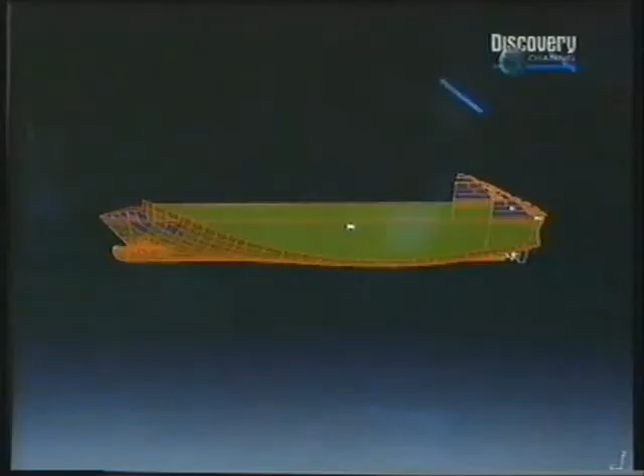This is what is dominating, and that's why you are defining a certain kind of block coefficient. The block coefficient is a relationship between the box you would get from the draft, length, and breadth of the ship. This is giving a box, and the shape of the underwater hull is only a percentage of this box. The displacement, the speed, and the length of the ship are very much married to each other, and this has been found historically during the development of shipbuilding. There is always a relationship to be kept, otherwise the power you have to bring into such a ship becomes much too high, and the economical factor goes down rapidly.

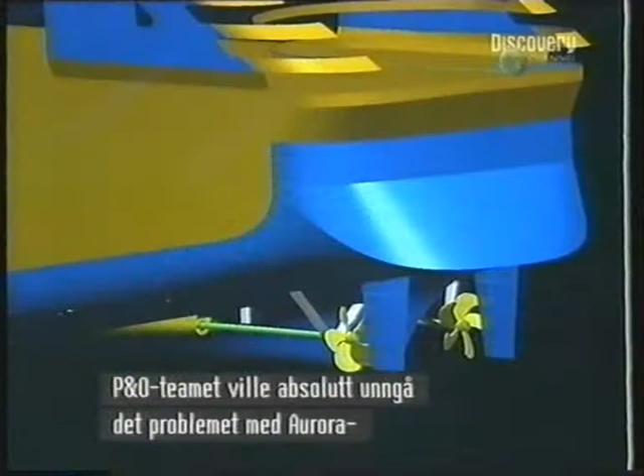Aurora's sister ship, Oriana, had suffered initial vibration problems at high speeds. The P&O team were determined to do everything possible on Aurora to avoid that problem and began to tackle it early on. We wanted to try and improve on the vibration characteristics that we had on the previous ship, the Oriana, which, whilst satisfactory, were only just satisfactory, and we were certainly looking for an improvement there.

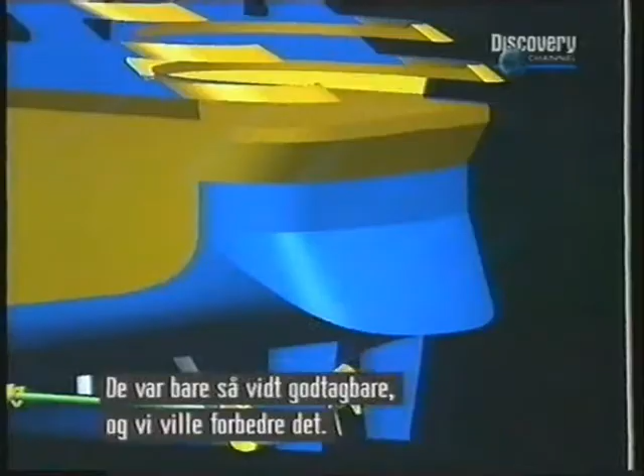At the aft end you will see the ship has a rather distinctive shape, what we call a ducktail on the end because it looks like a duck. The effect of this is to increase the waterline length and improve the flow of water into the propellers. The better the flow and stability of the flow into the propellers, the less likely they are to make noise due to cavitation.

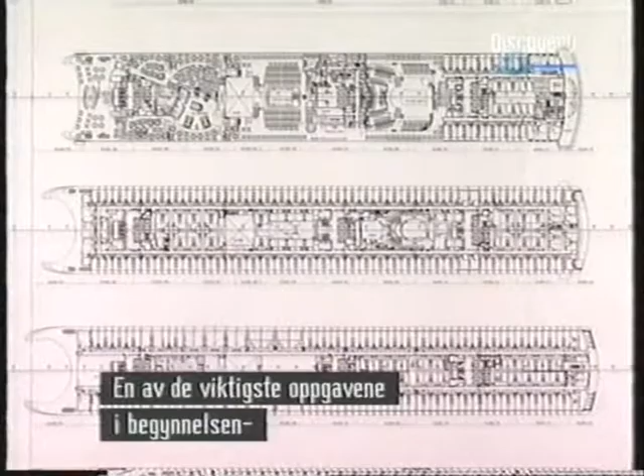One of the most important jobs to be done early on is the creation of what's known as a General Arrangement Plan, or GAP. Space is at a premium on a ship, and it's the GAP that divides up that space.

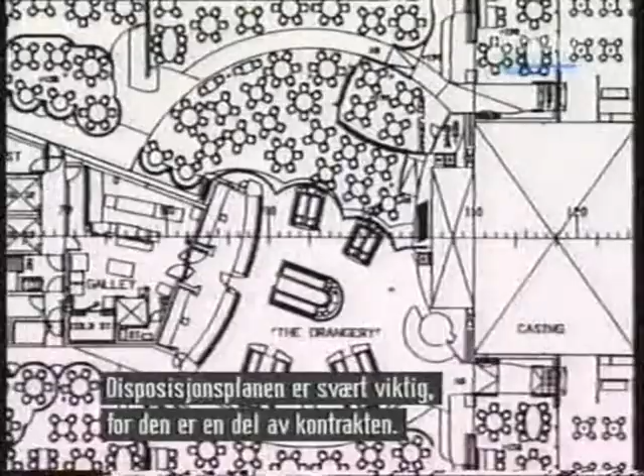The General Arrangement Plan is a very, very important plan because it is part of the contract. Everybody is getting his portion of the cake out of this General Arrangement Plan. That's why the discussions about it take a certain period of time, because you have to find compromises, not only with the shipyard, but also between the owner's side. They are fighting each other.

I want to grab that, I want to grab that.

So they have to come to compromises as well, with the target that everybody, or each department from the owner's side, can work comfortably with the space left for them.

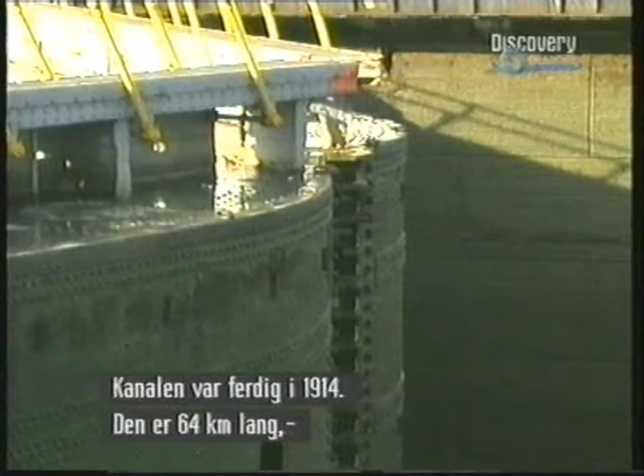P&O ships do round-the-world trips every year, and to do that a ship has to get through the Panama Canal. The canal was completed in 1914, is 64 kilometers long, and joins the Pacific to the Atlantic. More importantly, sections are just 33.5 meters wide, meaning a ship's width is restricted to go through it.

When we are starting with such a project, we simulate the ship in the Panama Canal lock, and we have to look at all the boundaries to make sure we can pass later on. From this simulation we print out drawings, and they have to be approved by the authority in Panama. The canal was widened once in the 70s, but there are no plans for further widening.

Oriana gets through the canal with less than two-thirds of a meter leeway on either side. But sections of Aurora were being designed that were wider than Oriana. P&O wanted some 40% of the cabins on the new ship to have balconies. They couldn't make the cabins smaller, so they had to make the ship wider. But then, how to get through the canal?

The extra balconies have resulted in a fairly radical change to the superstructure. Above the lifeboats, the superstructure actually flares out to give more width, so we can incorporate a decent-sized balcony on the 3 decks above the lifeboat braces. The section that juts out doesn't just have to clear the canal, but also the so-called mules, the small rail engines that tow the ship through.

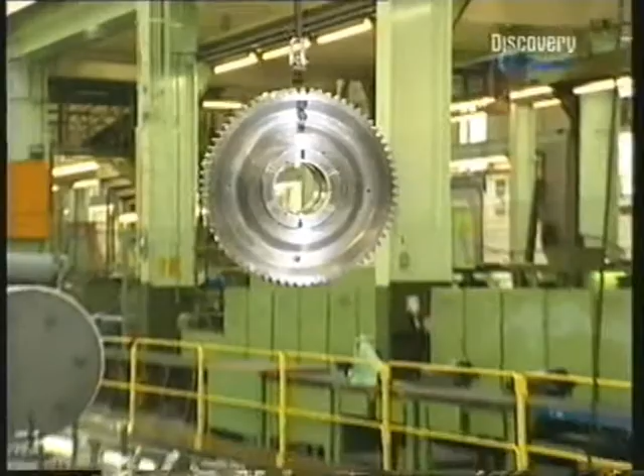This one's a relative baby. This is more like it.

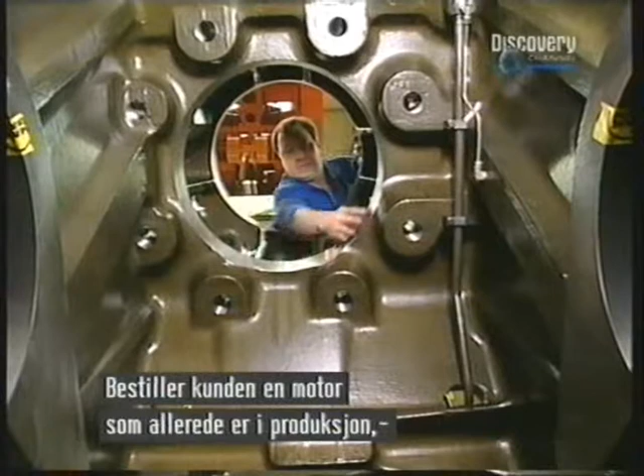Does a customer ask for a type of engine that the company already makes, or do they get MAN to design engines to order? A lot of our customers are very familiar with our diesel engine program, but normally they have in mind only a certain output of an engine, and they ask us which type of engine we could offer them.

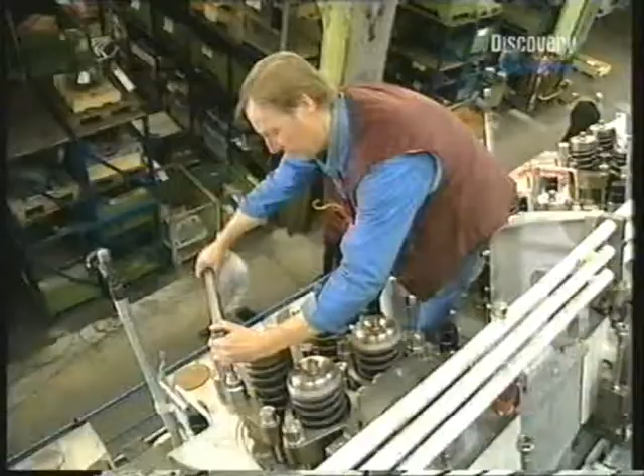And this is the engine they offered P&O for Aurora, a 14-cylinder V-engine, so called because of the arrangement of the cylinders. It's a V-engine, 14 cylinders altogether, with an output of 1,050 kW per cylinder, all in all 14,700 kW. That means more than 20,000 horsepower.

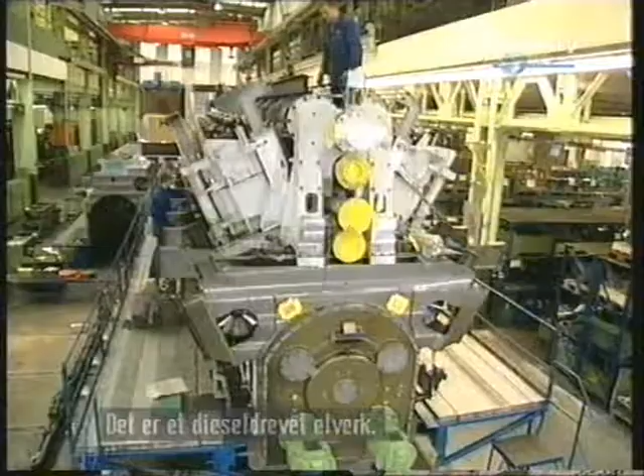They have 4 engines in one engine room, and that's a diesel-electric plant, so you go via generators. Oriana had been fitted with a diesel mechanical system. Aurora is to get diesel electric.

In a diesel electric ship, you work on the concept of an electrical power plant that provides all the power for electric propulsion and for what we call the hotel load, and the hotel load is the air conditioning, the lighting, etc. And we've got 4 big generators all producing electrical power.

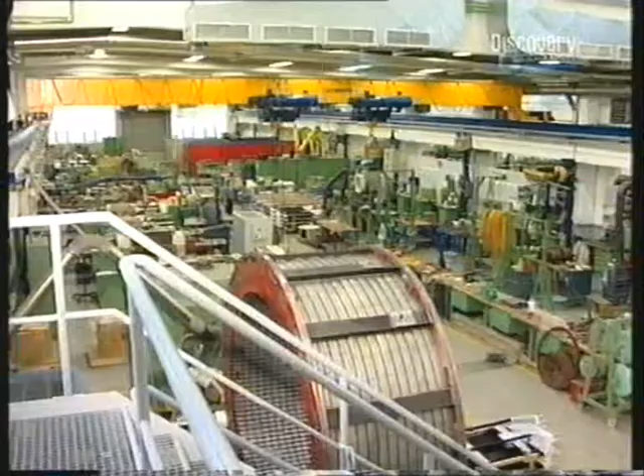Bremen in northwest Germany is just over 2 hours' drive from the Meyer Werft yard in Papenburg. It's the home of Lloyd Dynamo Werke, or LDW. Aurora's demands for electricity on the so-called hotel side will be greater than for other P&O ships, mainly due to the increase in the number of passenger galleys catering for the ship's new eating areas.

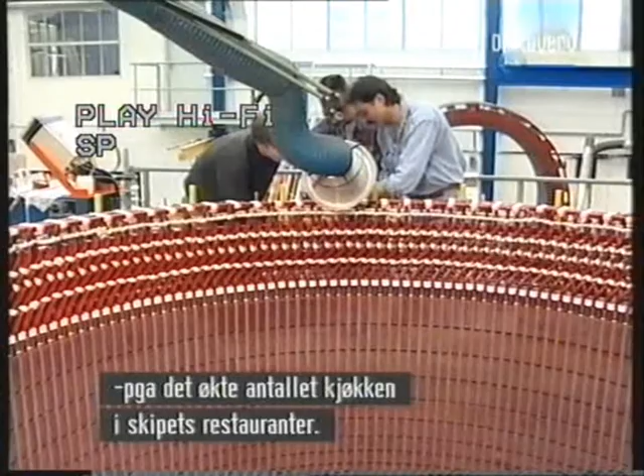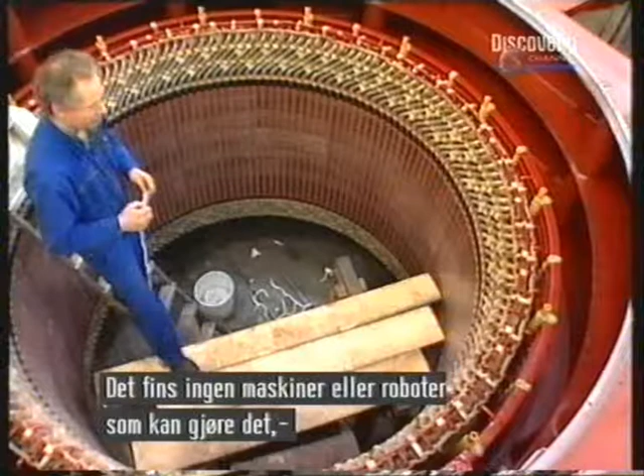Making an electrical machine of this size is very labor intensive because there are no machines for it, and it cannot be done by robots due to the limited number required worldwide. We don't manufacture machines for stock. All our machines are tailor-made according to the specification of the owner, classification societies, and consulting companies.

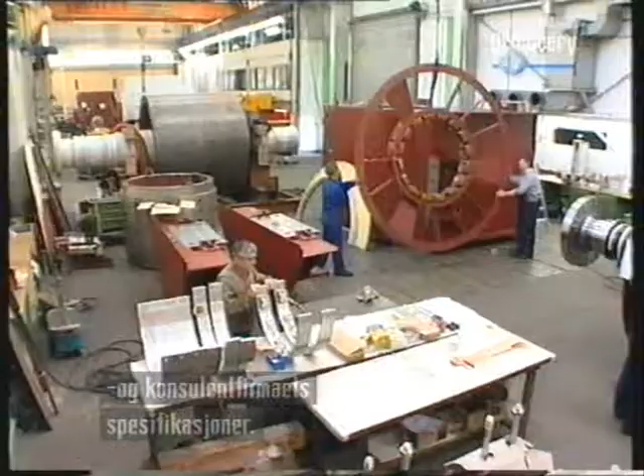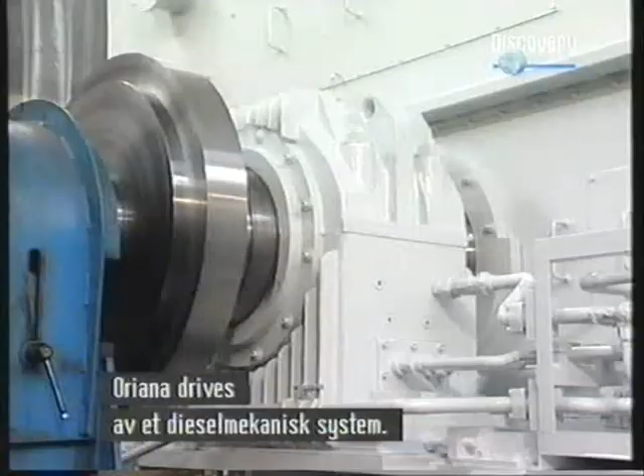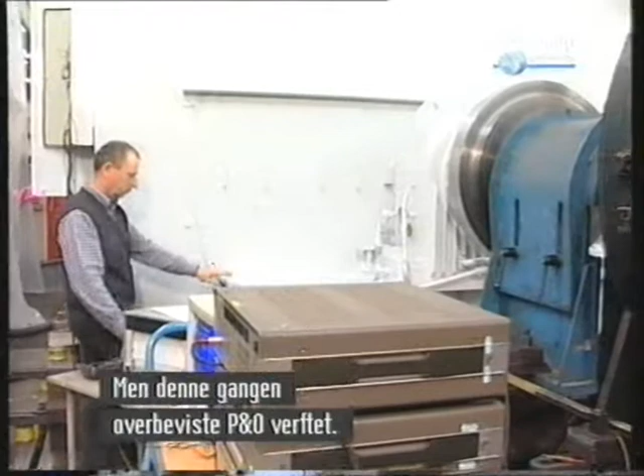The installed power of Aurora will be an astounding 58,800 kilowatts, equal to 80,000 horsepower. Aurora's predecessor, Oriana, used a diesel mechanical system, mainly because the Meyer Werft shipyard had more experience with that setup at the time and dissuaded P&O from going diesel electric. This time, however, P&O convinced the yard. All our new building ships are built with diesel electric propulsion, so this was a natural extension of the other new building ships in progress. I think Meyer Werft finally realised this was the way to go, with no cost penalties for adopting diesel electric propulsion.

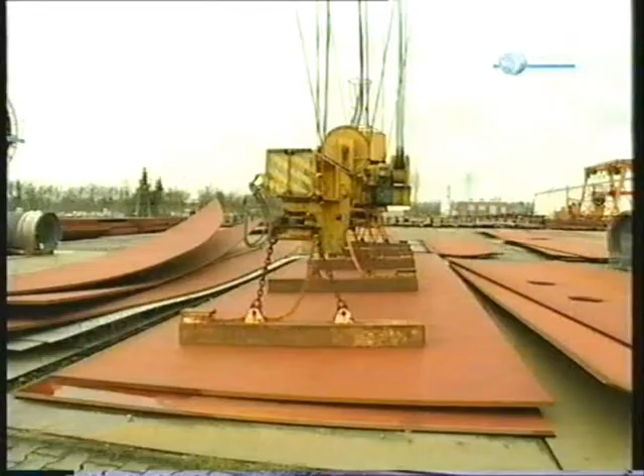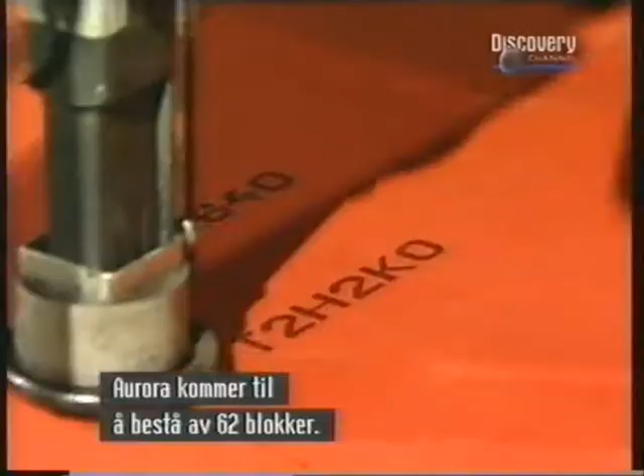At the Meyer Werft yard in Papenburg, work has begun on the sheets of metal that provide the basic structure of a large ship like Aurora. These sheets will be cut and shaped into different sections called blocks. Each sheet is numbered and will eventually form part of a block. Each block is also given a number, and by following the general arrangement plan, the blocks are put together a bit like a Lego kit. Aurora will have 62 blocks. The sheets are cut into shape underwater in order to keep the intense heat concentrated.

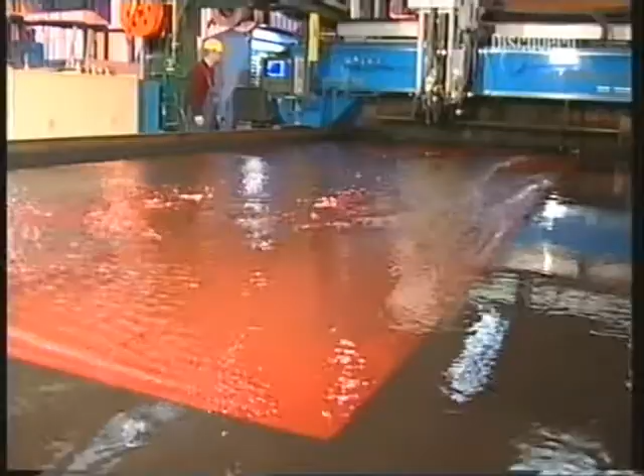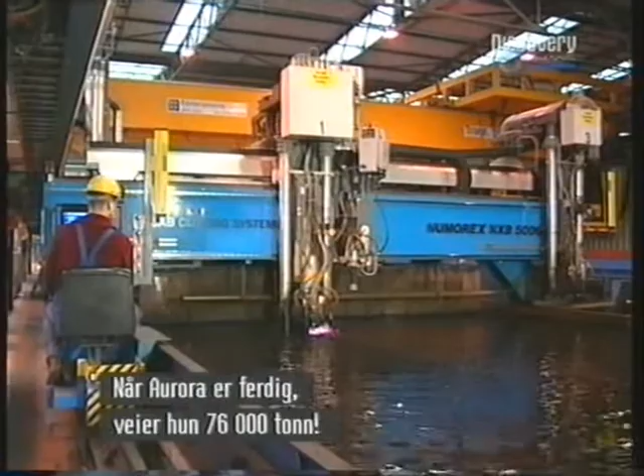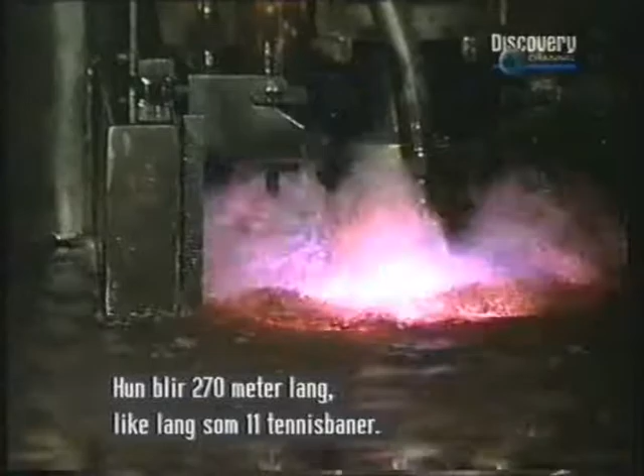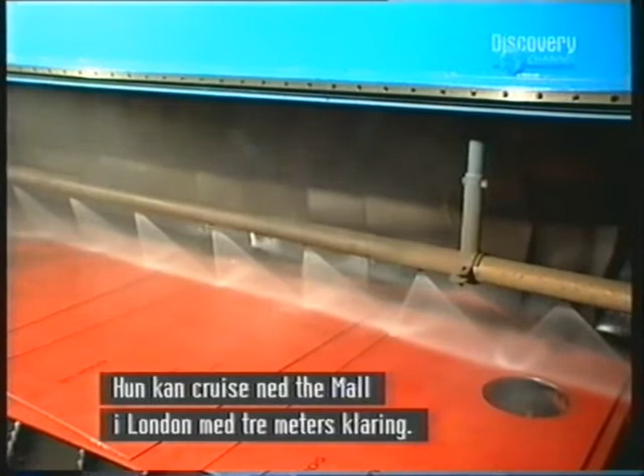The yard's task stretches ahead of them, and what a task. Aurora, when finished, will weigh 76,000 tons. At 270 meters, she'll be the length of 11 tennis courts. Standing 62 meters tall, she'll be 10 meters higher than Niagara Falls. At 32 meters wide, she could cruise down the Mall in London with just 3 meters to spare.

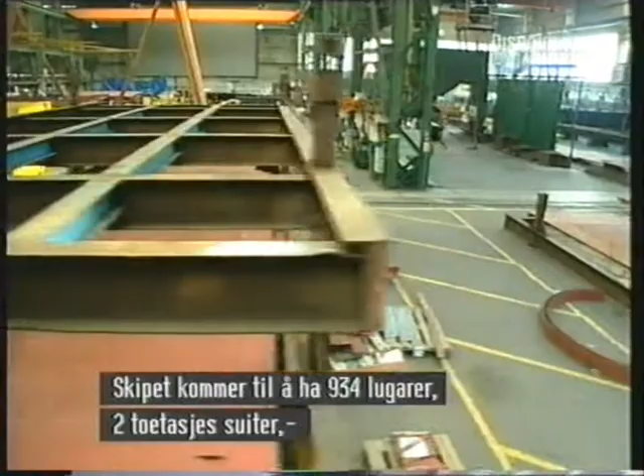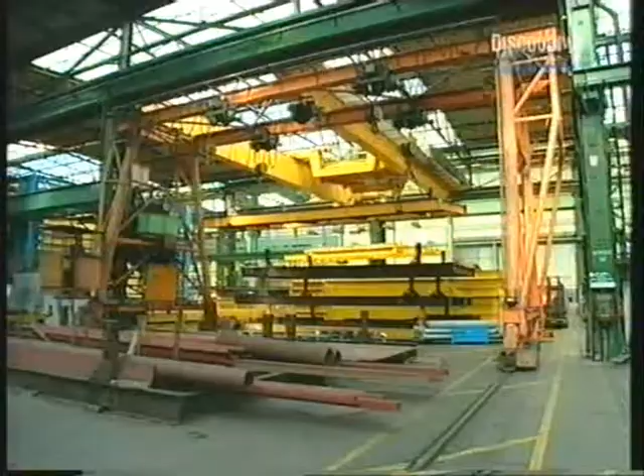The yard will be building a structure that will carry around 1,800 passengers and over 800 crew. The ship will have 934 cabins, including 2 two-deck penthouse suites, 10 suites with balconies, 18 mini-suites with balconies, 96 staterooms with balconies, and 272 standard rooms with balconies. There'll be 2 main restaurants, a deck restaurant, a deck cafe, a 24-hour bistro, and a coffee bar, to say nothing of the 12 bars and pubs.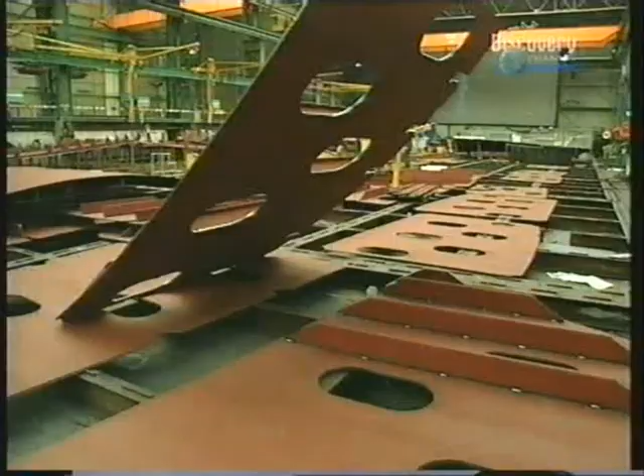And all of these will be housed in the steel structure being put together here in Papenburg.

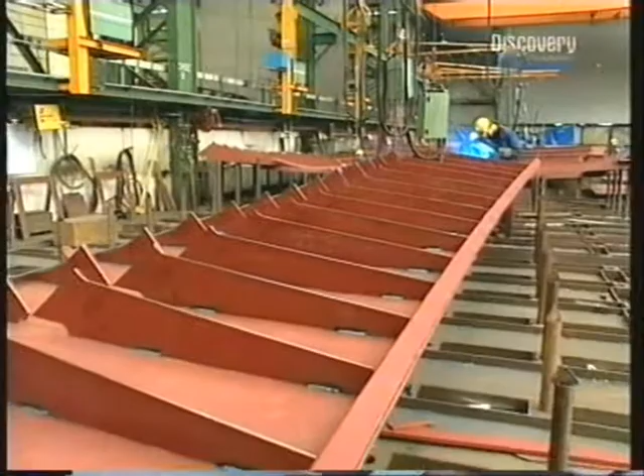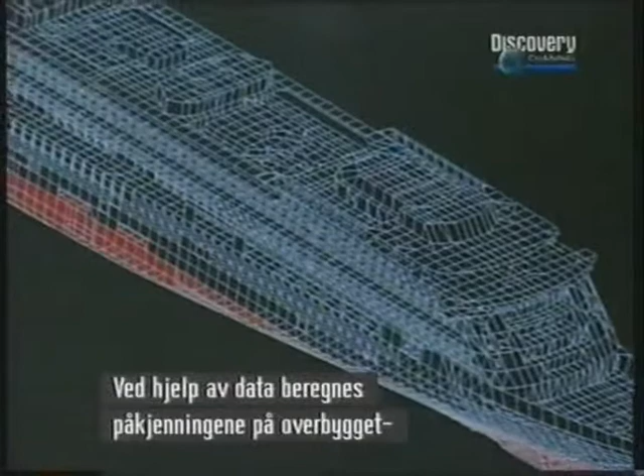Beyond all this is the need for the yard to ensure that the way they're putting the steel together will be up to the stresses and strains of long sea voyages. We have to calculate the strength of the vessel according to class requirements, which say you have to calculate the vessel on the wave crest and on the wave trough. Computer graphics are used to calculate the stresses and strains on the superstructure in the most extreme circumstances. From wave crest to wave trough, the ship can bend as much as 300 millimeters.

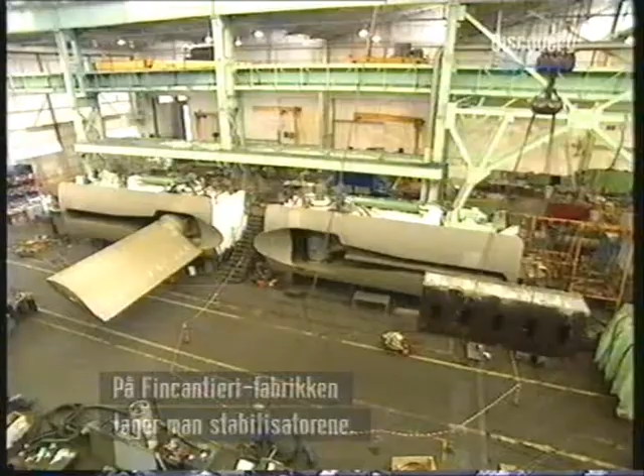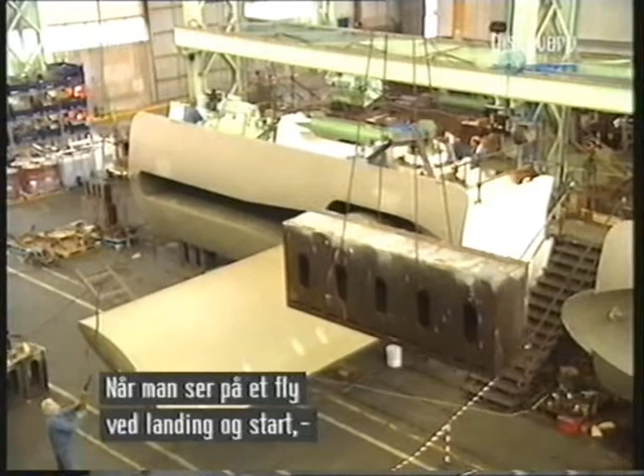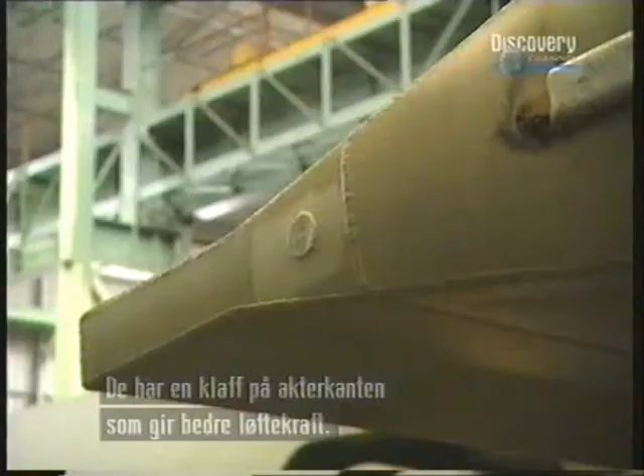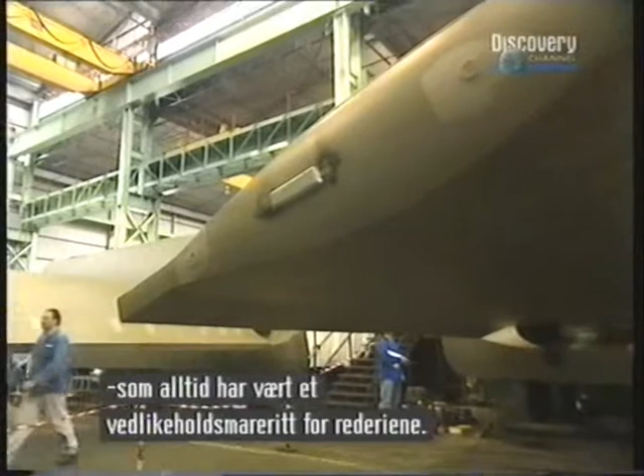But it's lateral movement, the roll of the ship, which can most upset passengers. Just outside Genoa in Italy is the Fincantieri factory, making the stabilizers for the ship. There'll be 2, just aft of the middle of the hull, measuring some 7 meters by 3 meters each. If you liken a stabilizer fin to an aircraft wing operating in water, when an aircraft lands or takes off, flaps go down at the back edge of the wing, giving more lift at low speed. Many stabilizers are built on that principle, with a flap at the aft end that drops down to give more lift. But modern stabilizers, through clever design of the fin itself, have managed to avoid this moving flap, which was always a maintenance nightmare for ship operators.

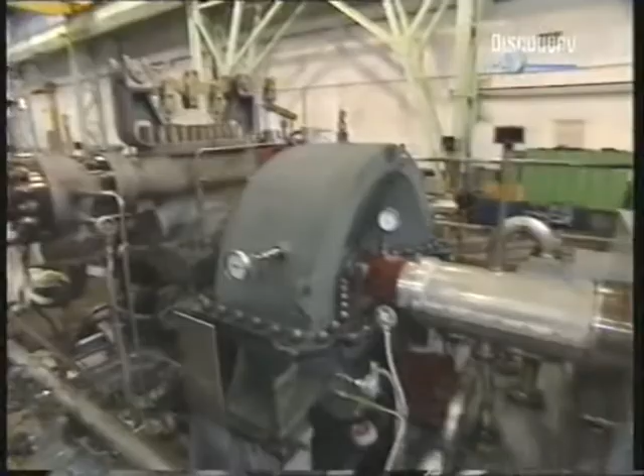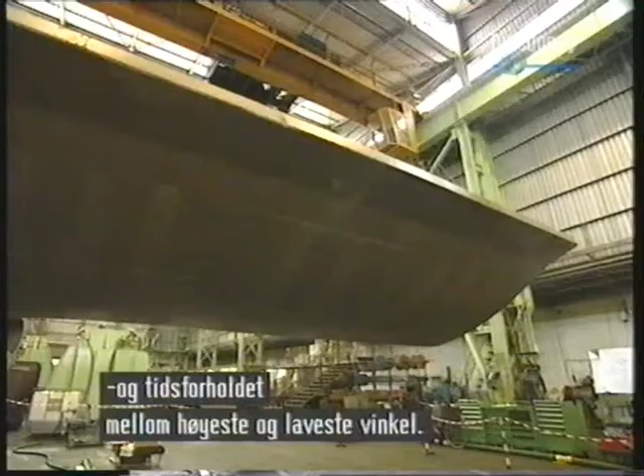In the workshop test, we test the performance to see whether the design, which we developed together with Fincantieri, will achieve what is specified in the contract. This means we have to measure the rigging-in and rigging-out time of the stabilizers, and the time from the top angle to the lowest angle. These are indicators to check whether the specification will be met. Rigging-in time is important, for example, so that the captain knows how quickly he can bring the stabilizers back in case of emergency.

But it's not all iron and steel. Here in London, the designers have come together with P&O's chairman, Lord Sterling, to assess the interior design of the public rooms.

Hello. Good morning. Good morning, how are you? Nice to see you, how are you?

Fine, thanks. Right, where are we? Well, first of all, let's get the prizes out of the way. What's the betting for the game on Saturday, England versus South Africa? The referee will win that one. Oh, there speaks a Welshman. He's so carried away with the game two weeks ago.

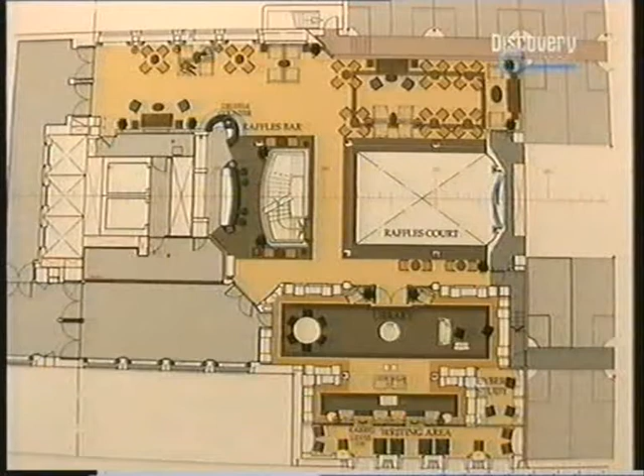It's not just the designs and plans that are laid out, but the materials that'll be used as well.

So we start on deck 5, where we have the embarkation and the feature staircase, which goes from 5 to 8. It's really about getting the approval from the directors and seeing the ship as a whole. We work separately in our offices and don't get the opportunity to come together to really appreciate how our areas flow together and how the whole ship will look when she's sailing. It's a great opportunity for us to see that development and to make sure we're creating the right thing for P&O.

Through the corridor and into the bistro called Café Bordeaux. Having just come back, it's really interesting. So as we continue into the space, we become more traditional, where we've got the timber floor, very rich finishes, and it's more of the bistro, the restaurant side of it.

What they wanted to do was get the atmospheres to flow between all of the areas. So obviously we had to link Café Bordeaux, on deck 8, with Champions and Monte Carlo on deck 7, and that's where you find the rotunda and the staircase which winds up between the two. You've also got to make all the atmospheres flow together, but make each room feel as though it has its own intimate space, as though you're not sitting in a corridor. So that planning aspect was quite difficult.

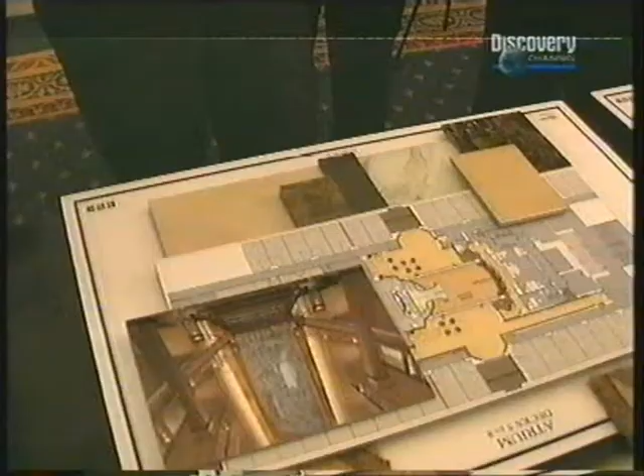With my own wife, for argument's sake, I can tell you, she will not even go up a step like that. There's a feeling that you might slip through, or you can see down and see a distance. You can't see down because the step protrudes underneath the one above it. So you'll only see it straight on. Yeah, but anyway, can I leave it?

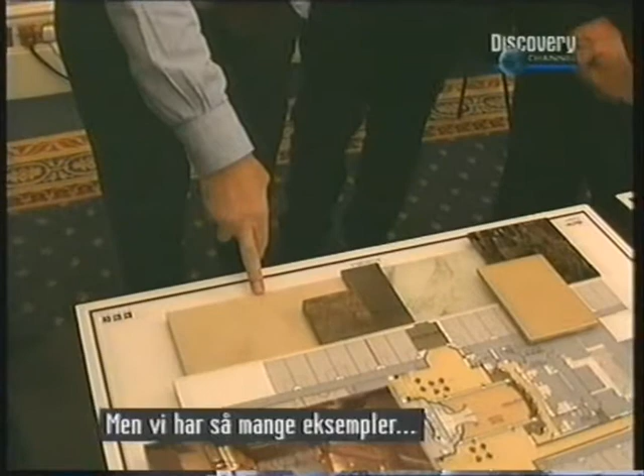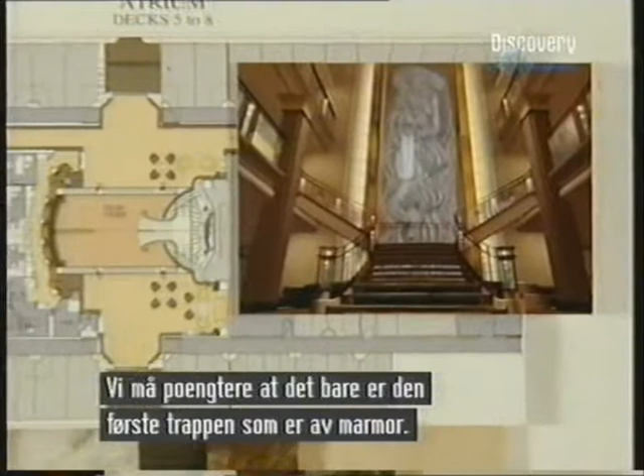In presentation, it looks very attractive. I think what I am saying is we've had so many examples, and you always find it when we do the gift ceremony, which we've usually used as an area. You're continually being very careful all the time, and a number of times people have slipped. There have been quite a few accidents in the States on that. It's a very smooth finish. Yes it will be, but we should emphasise that it's only the first flight that is marble.

Meanwhile, deep in the heart of the English countryside, another different kind of work of art is underway. John Mills, a graduate from the Royal College of Art, is perhaps most famous for his 3-metre bronze entitled Blitz, which stands outside London's St. Paul's Cathedral. For Aurora, John's been commissioned to make a 10-metre tall bas-relief that'll dominate the ship's main atrium.

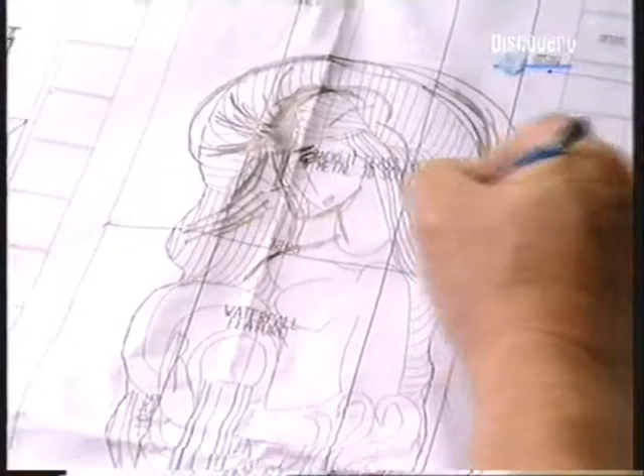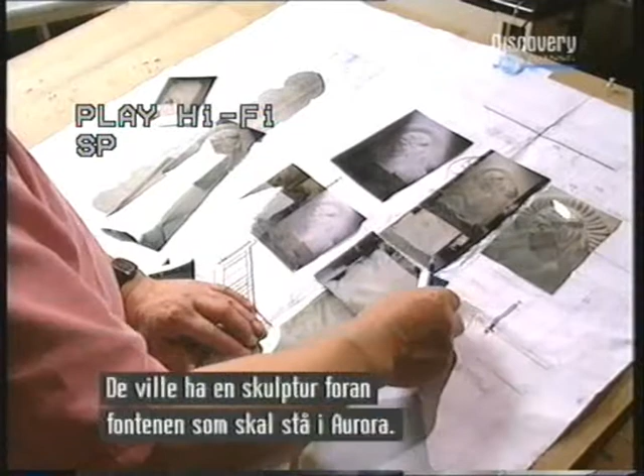This came about because the company Watermark, Hydrodynamics, had done fountains with me, and in this case they wanted a sculpture to go in front of the fountain they were doing for Aurora, so I'm working directly with them. They came up with a tiny drawing of an idea of a traditional psyche of the world kind of sculpture, and I said I would do it as long as it was done my way, so I produced a maquette, a sketch model. The company, P&O, agreed to that.

So we produced the big one from that, scaled up. The final piece is 30 feet high, 7 foot wide, with a full waterfall behind it and free water flowing through it.

A few technical problems, like fixing it down in a ship - that's an important aspect of the technical side of sculpture, because of the lean of the ship. In this case, the water has to stay put with up to 18 degrees of lean. So the way the water flows down the sculpture is very important, and it's part of the modelling to make the water stick to the wall, as it were. That's the one technical aspect.

We actually made the piece by carving it in polystyrene. Polystyrene is quite a facile material, and it enables you to work very quickly, and you can get any surface finish you like on it. It also enables us to work on that scale with less equipment, because you can handle the big pieces quite easily due to the light weight. So that's the way we're doing it.

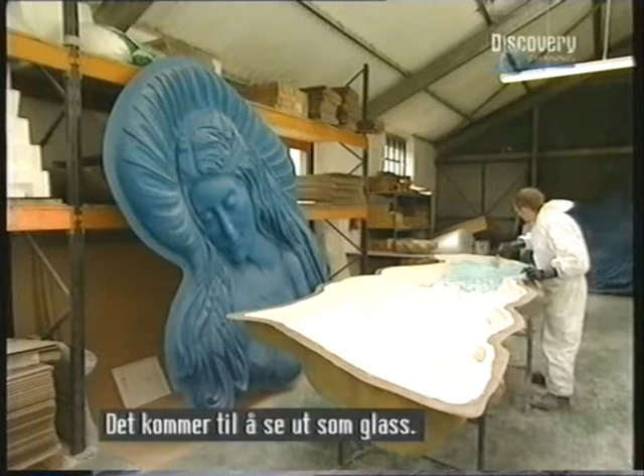From the polystyrene carving, rubber molds are made, and we will be making it look like Lalique glass. So it will be a kind of faux verre, made of resin, GRP. It will be translucent, so light will be able to shine through it, and then water running through it as well. So it's quite an interesting piece of sculpture.

Illumination is there to give a general soft illumination over the whole thing. It works really well now. I think we should have you standing behind the real thing with that light. The effect is very, very good through the texture of the polystyrene.

Well, we've been working on it for about 8 or 9 months now. We have the casting to complete and the colouring to complete. And then we'll take it to Papenburg and actually erect it in the ship, which has to be completed by January, February - so about a year in all.

In Papenburg, it's time for the keel laying ceremony. It's the start of putting the massive steel blocks together and is an emotional occasion, even if it wasn't Christmas. Inside the huge shed in which the ship will be built, thousands of Meyer Werft workers gather to witness the ceremony as the keel, block number 1, is lowered into place.

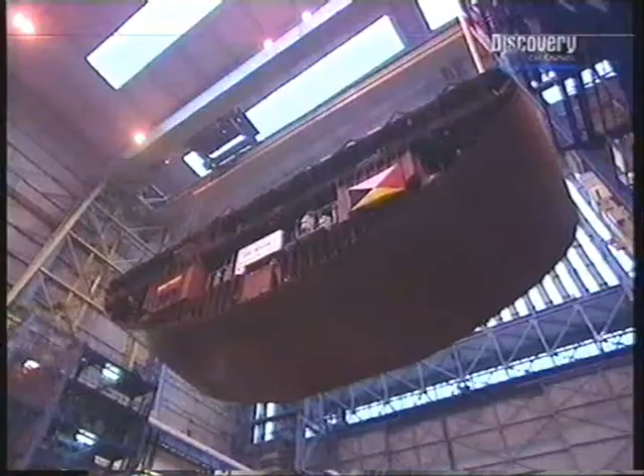Every time one comes, one tends to think that it's going to be another business occasion, but whether it's a keel laying or a naming, no matter how many you've been to, it still is quite emotional. It's quite special to see the start of such an enormous project.

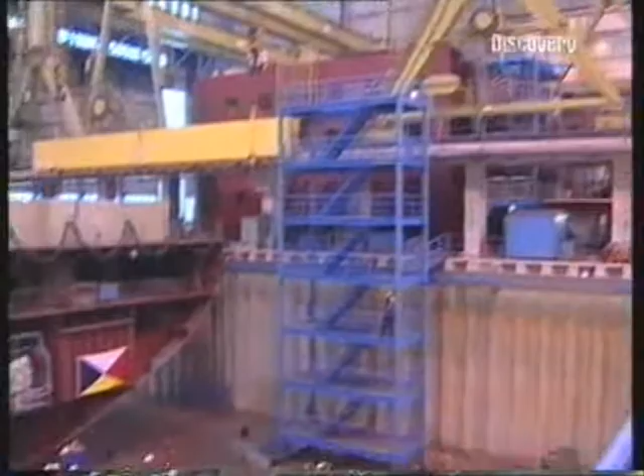It's tradition to place coins under the body of the hull, and as the managing director of a 200-year-old family firm, Bernard Meyer isn't one to buck the system. It's done!

Mr. Meyer, ladies and gentlemen, it's a great pleasure to be with you all here on the occasion of the laying of the keel of the ship that will become Aurora. In 14 months, Aurora will come out of the dock as a completed ship. It is a great credit to Meyer Werft that they are able to produce a ship in what I still today consider to be an incredibly short time. So Mr. Meyer, thank you very much to you and your fellow workers here at Meyer Werft for everything that you will be putting into this great new ship. Thank you.

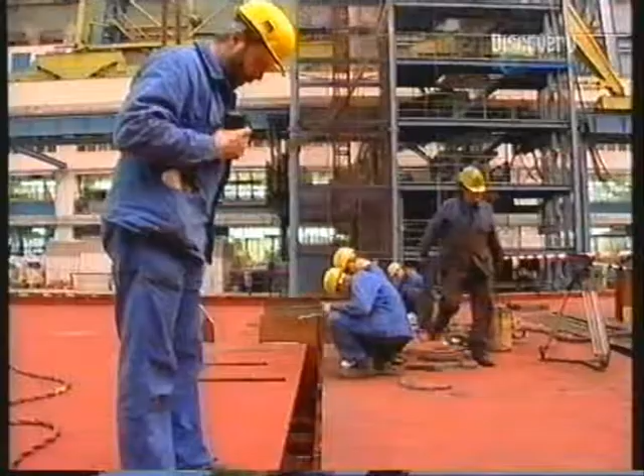Blocks will arrive fast and furious now. Meyer Werft have committed themselves to completing the ship in 14 months. Most of the blocks will be assembled here at the yard itself, but some, like those containing the stabilizers, have been subcontracted to other companies. The reason for that is to help speed up the manufacturing process.

We speed up the production for those kinds of ships tremendously. We have concentrated on building passenger ships, and we have consequently optimized our production system of building ships - the block system, as we call it, or the Lego system.

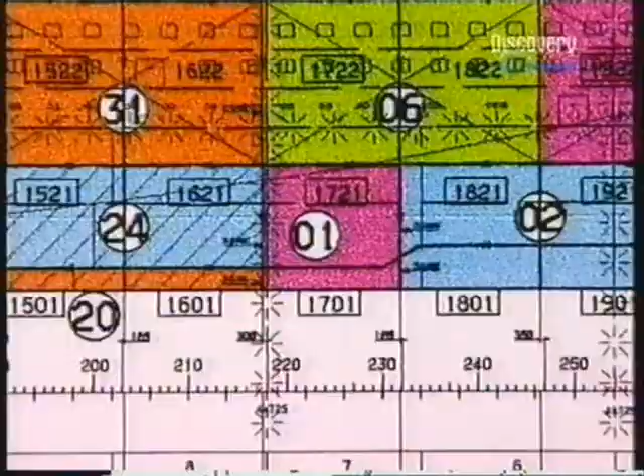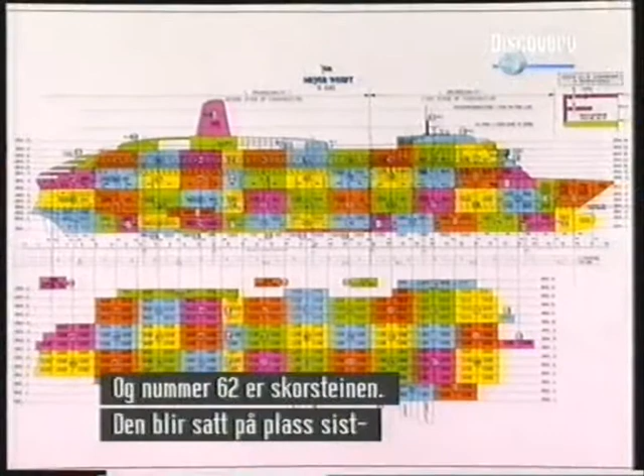There'll be 62 blocks in Aurora. Block number 1 was the start of the keel, and number 62 is the funnel, which goes on last, mainly because it can't be fitted inside the hall itself, as it's too tall.

The block system may seem to have removed some of the romance from shipbuilding, but it's methodical and understandable to everyone involved in the project.

Like on the Galeere, boom boom, every week a new block is coming. The block system was a new system where everybody on the shipyard could follow. He knows block number XYZ is coming in week XYZ, so we have to bring all the material, the logistics, to this block in time. By this, we could optimize the production tremendously.

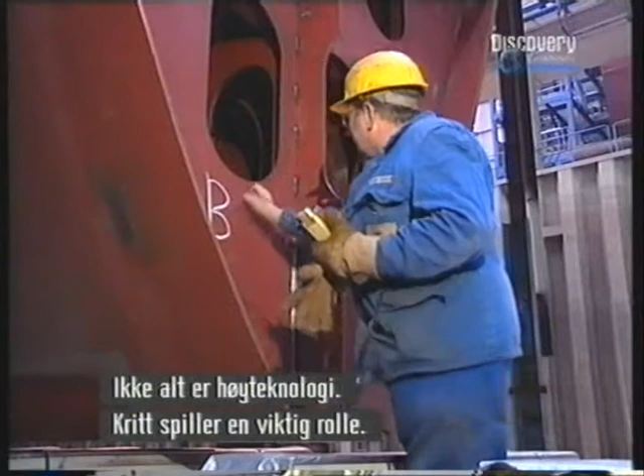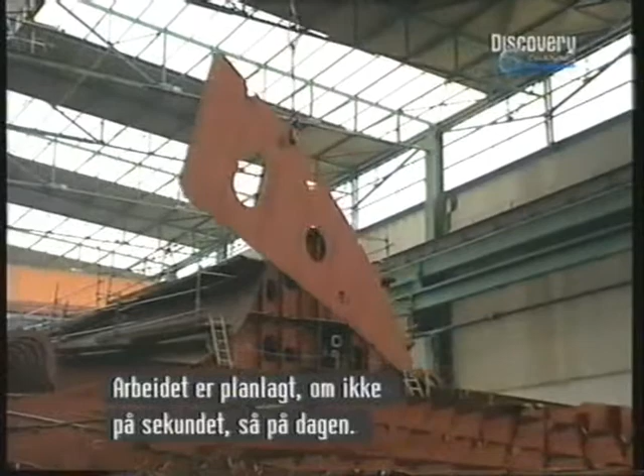And it's not all high-tech. Plain old chalk has a serious role to play. The operation is timed down to, if not the second, then the day. As each block is completed and put in place, others are being constructed from the steel sheets.

As the sheets are welded together, the sheer scale of the operation becomes more and more apparent.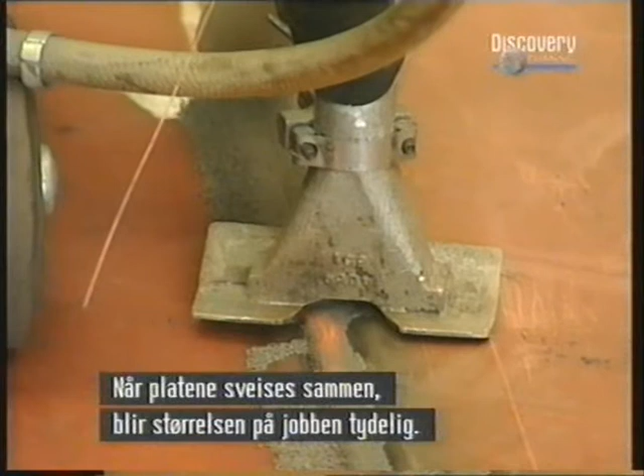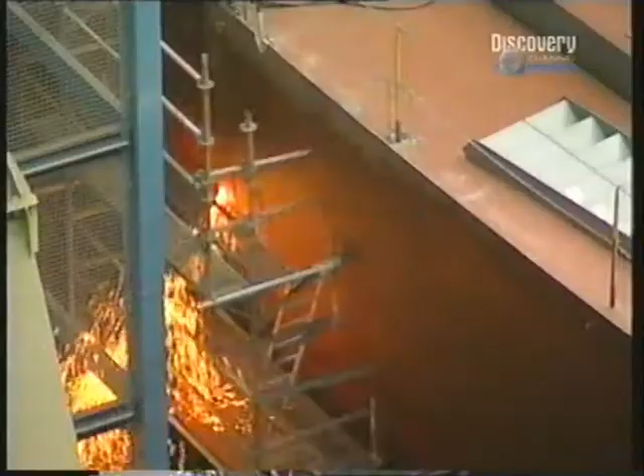Put on the profiles and put on the walls, the girders and so on, and step by step it became a section, and the section, 10 sections, builds a block, and we build up the blocks up to 600 tons. This is a maximum weight because of our cranes.

The blocks aren't just hollow shells. As much piping and wiring is fixed into each block as possible, as it's made. We can work outside in the workshops or in the block because the working time is less, and you can work easier and better outside in the block than on board.

That's why we try in the blocks to put all the coordination, the piping, ventilation, electrical fittings and so on.

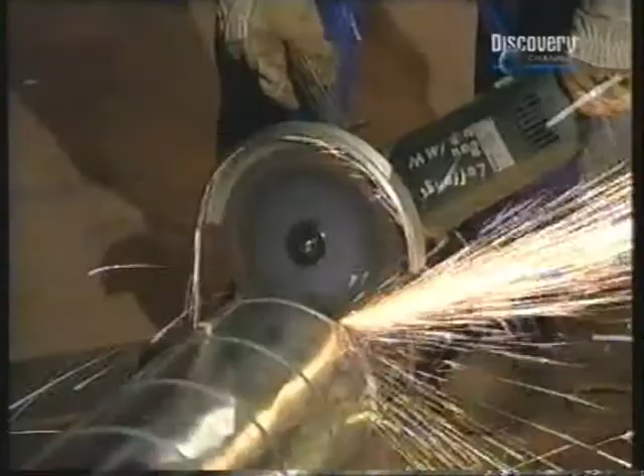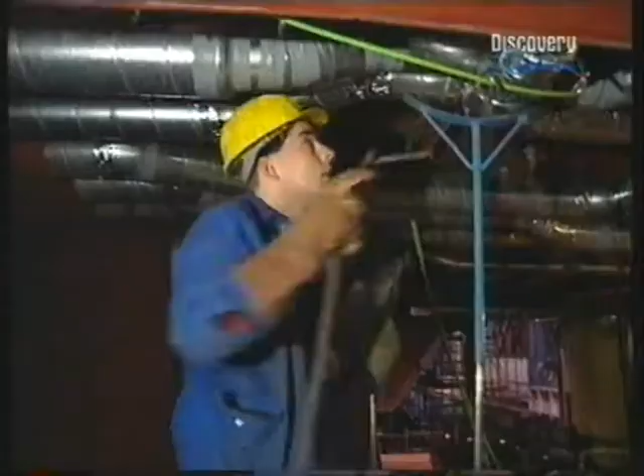It's this system of prefabrication, building as much as possible into each block, that has enabled the yard to shorten construction time, and that's impressed the engineers at P&O.

In the pre-planning of the ship design, they're trying to optimize that to allow more prefabrication of modules, machinery modules, cabin modules, technical modules throughout the ship, so that once the hull starts building, they can drop these prefabricated modules in, and it speeds up by a great extent the actual production process at the end.

As the prefabricated blocks begin to build up, Aurora starts to look like a massive doll's house.

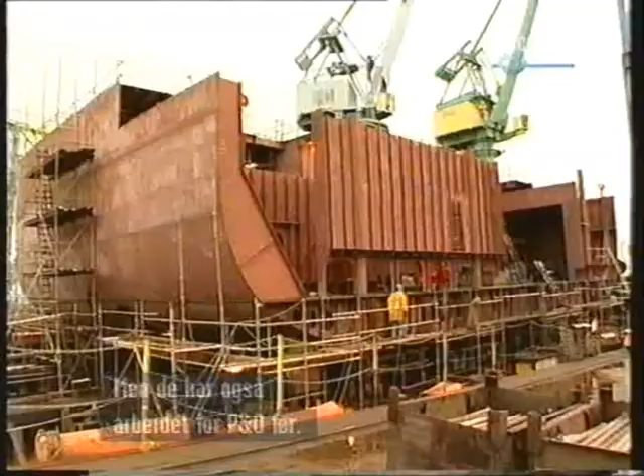Just a few hours away by road from Papenburg, in Bremerhaven, is a more traditional yard, SSW. Unlike Meyer Werft, whose building dock is at water level, SSW still has a slipway. But they too have worked for P&O before.

20 years ago, or a bit longer, we built the first two vessels, called Norland and Norstar. And then we built, 4 or 5 years ago, some ferries. They are crossing the channel from Zeebrugge to Dover.

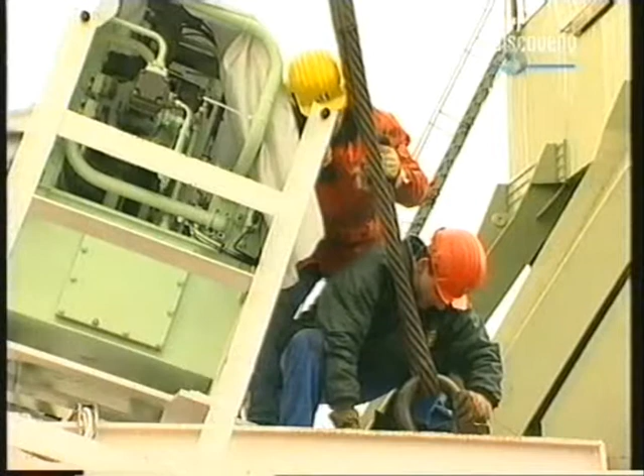SSW has been subcontracted to build and deliver 4 blocks, including the block that will contain the stabilizers, which themselves have been delivered from Italy and now have to be fitted into the blocks.

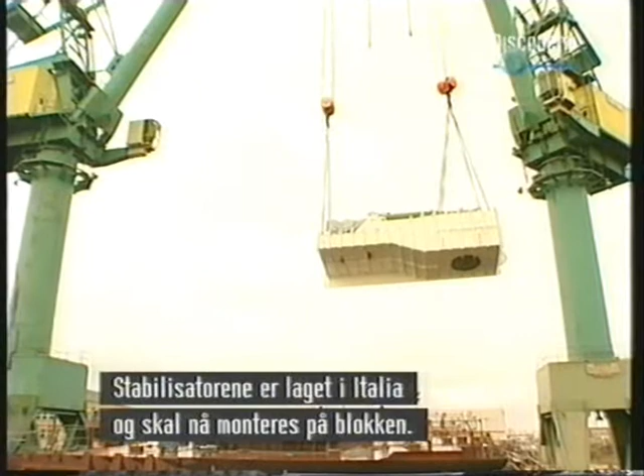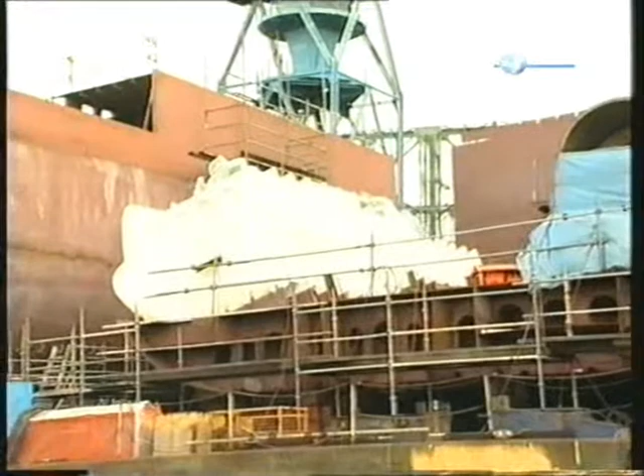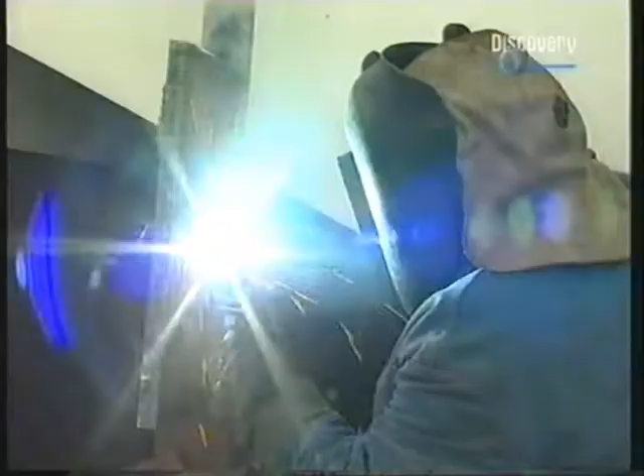We got the contract in the middle of last year, so let's say in June and July 1998, for 4 blocks. From the pre-assembling till launching, we need roughly 5 months.

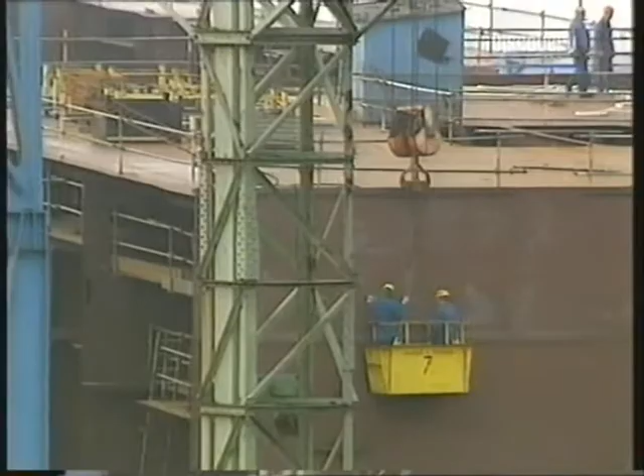This block is, from the dimension side, 32.1 meters. The length is about 20 meters, and the height up to the third deck, 8.1 meters. Our maximum breadth is 30 meters on the slipway, and these blocks are 32 meters. Therefore, we have also a different way to launch these blocks.

After this launching, we have to make a function test of the stabilizer fin boxes, or the stabilizer fins you see behind me. And we have also the function test of both sides before going right through the River Weser to Papenburg.

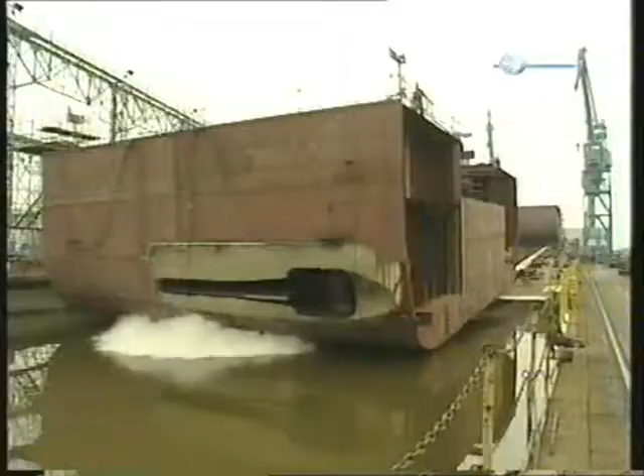And so, with not a bottle of champagne in sight, the block is launched down the slipway. Almost gets away.

The small southern Indian state of Goa is associated in the minds of most Europeans with great beaches, hippie markets and holidays. Yet for P&O, it's long been a place for people to man their ships. Around 50% of the staff on P&O liners are from India, and at one stage, most of those were Goan.

It's a connection that stretches back to the middle of the 1800s and the days of empire, and then through the days of the so-called Great White Ships that used to carry people back and forth to Australia, the Far East, and India itself. Goa was once a Portuguese colony, and its links to the sea are strong.

P&O's links to India are just as strong, and it was the first liner company to open a permanent office here in Mumbai. As a result of Aurora, there are some 600 vacancies, and the initial interviews alone took a solid 13 days. We are one of the first cruise companies to have had a manning office in Bombay, in India for that matter. When you start a company of your own, you know that you have recruited so many people, you are keeping track of them when they are on leave, like when they report to you for medicals, and you get your trained people back when you want them back on board.

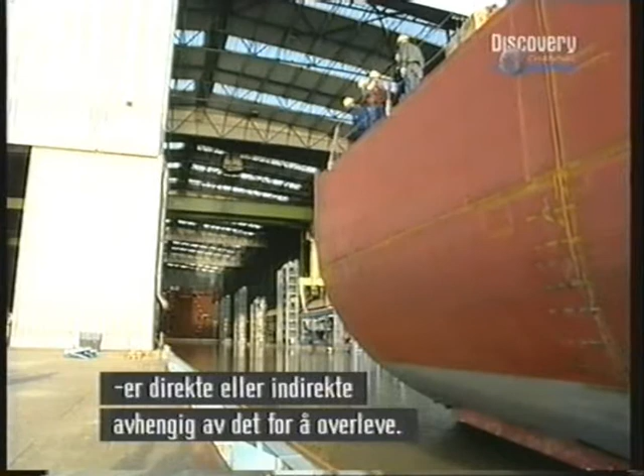But Meyer Werft is in one of the poorer areas of Germany, and virtually the whole town of Papenburg relies on it, directly or indirectly, to make a living. The workers at Meyer Werft are determined to protect their jobs and get the ship down to the sea.